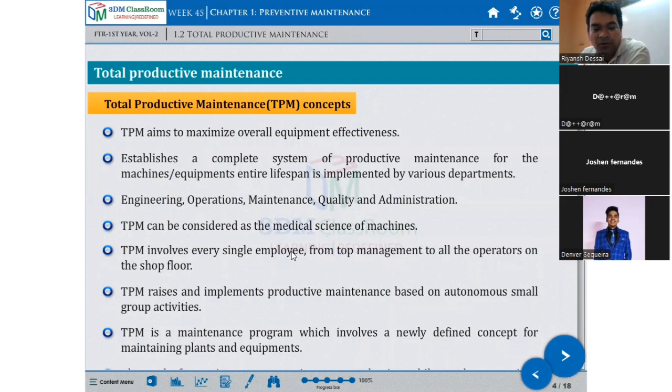TPM involves every single employee, from top management to all the operators on the shop floor. TPM raises and implements productive maintenance based on autonomous small group activity. TPM is a maintenance program which involves a newly defined concept for maintaining plant and equipment.

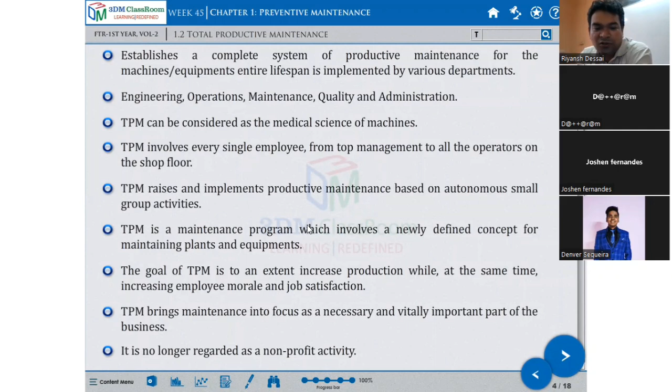TPM brings maintenance into focus as a necessary and vitally important part of the business. It is no longer regarded as a non-profit activity. Downtime of maintenance is scheduled as a part of the manufacturing day, in some cases as an integral part of the production process.

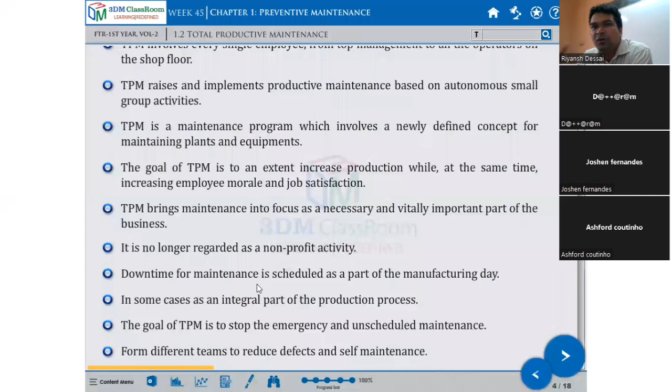Downtime means what? Suppose there is a breakdown, a 6-hour breakdown of the machine - that will be noted as downtime. It will remain in the log and schedule, noting that day the machine had a 6-hour breakdown. If there is a power failure, anything can happen. Whatever the time out of 24 hours - 3 hours, 4 hours - if the machine is not running, is under maintenance, that work is not getting done. That comes under downtime. But it's a loss for the company.

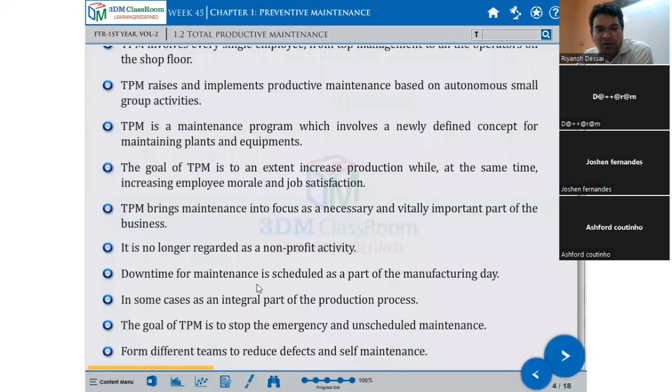The goal of TPM is to stop emergency and unscheduled maintenance, involving different teams to reduce defects through self-maintenance. These are the various uses of this type of system, total productive maintenance.

What are the advantages? Avoid wastage in a quickly changing economic environment. Overall, they are trying to reduce wastage of time, material, and manpower. There is also a time study, checking where the machine is getting extra time, delay, or transportation time - overall taking steps to avoid wastage in the quickly changing economic environment. Economic time wasted means there is a loss of money.

That has to be studied in this department - to produce goods without reducing product quality. This is challenging. They are producing goods without reducing product quality, meaning there is no sacrifice of quality. No one may sacrifice on quality. It produces goods without reducing product quality. If they want a surface finish of so many microns, they have to give it the time; they cannot negotiate with quality. They cannot sacrifice, because there will be rejection afterwards.

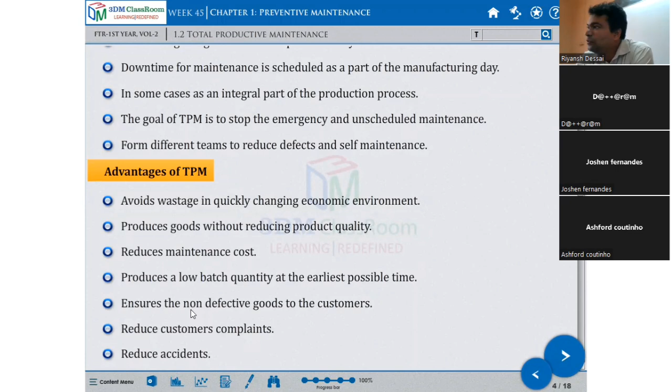So if you follow this system, there is an ensure that no defective goods going to the customers. Reduce the customer complaint. In non-defective items, customer complaints will be reduced, no? Otherwise the customer complaint handling becomes a burden. Now for example, your mobile phone.

Mobile phone - if the manufacturer Samsung company supplies a defective product, what will happen? Customer will send it back again. Then under warranty, they will rework everything, so waste of money. Suppose they have sent a quality product to you after checking and formulating everything, there is no complaint from the customers.

So here, this system gives total productive maintenance. The Samsung phone company, if they follow this type, they will follow this total productive maintenance.

Now, reduce accidents. If you maintain your machine properly, accurate, and everything - all machine guards and maintain the system - there will be no accident. If there is an accident in your company, again there will be a loss for the company. Therefore accident, medical insurance for the family, it's a problem - it becomes a record that there was an accident happened in so and so industry. It will remain on the record.

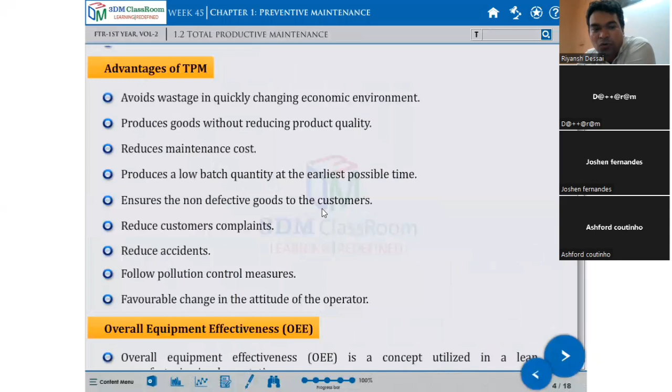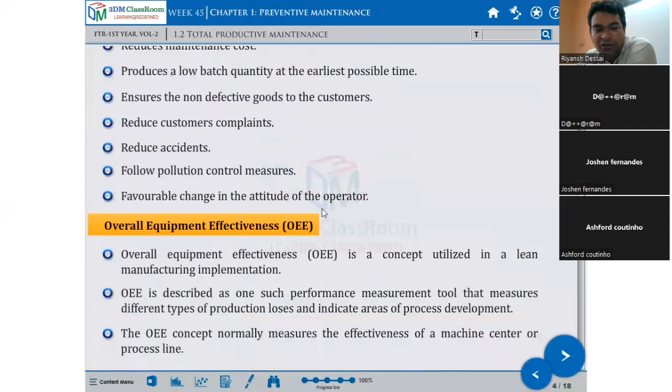Now, overall equipment effectiveness. First in TPM, we should know the full form of TPM - total productive maintenance. What are the concepts you can note down? You will find them in your book also. Then advantages and overall equipment effectiveness. Now what is overall equipment effectiveness? Equipment means - ordinary people can understand example like lathe machine, drilling machine, any equipment.

Overall equipment effectiveness, in short form you can write OEE, overall equipment effectiveness, is a concept utilized in lean manufacturing implementation. OEE is described subject a little bit in a management type way - try to understand, okay? But this theory is used nowadays within all industries. So OEE is described as one such performance measurement tool that measures the different types of production losses and indicates the area of process development.

Please try to understand this sentence. Overall equipment effectiveness is described as such a performance - performance means how we are doing, like cricket, Virat Kohli every day in the match. So performance is something that people note down - today how many runs he scored, how many balls. Same way in the machine also, there are such performance measurement tools.

They measure how many times the machine breaks down, how many times the operator takes for loading purpose - all things are measured. They measure how much time is wasted, how many times the machine belt failed - this type of study is going on. So measurement tools measure the different types of production losses - meaning if there is a breakdown, motor stopped, motor tripped, electric problem, switch burnt - this is the type of production losses. And it indicates the area of process development - like if there is a short circuit and damage of the MCB, motor getting heated and tripped, and the conductor or machine burns.

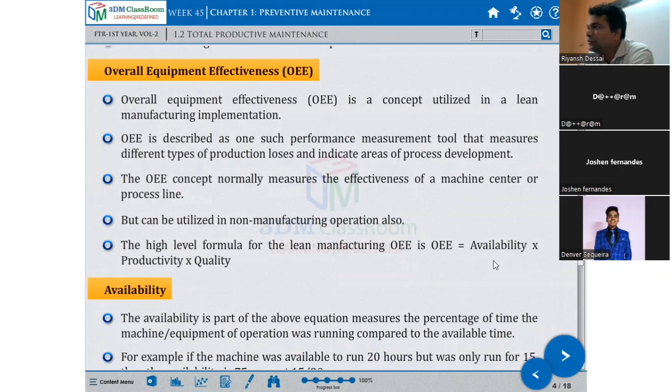Availability is part of the above equation. It measures the percentage of time the machine or equipment of operation was running compared to the available time - how much time the machine was available, how much the operator used it. That is the availability.

That is the percentage of time the machine or equipment is in operation - how much time a turning machine is running compared to the available time. For example, if the machine was available to run 20 hours but was only run for 15, then availability is 75%, that is 15 upon 20. So this is availability - you have to calculate that.

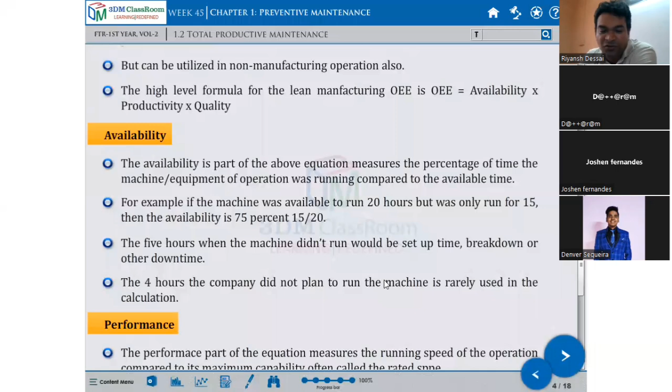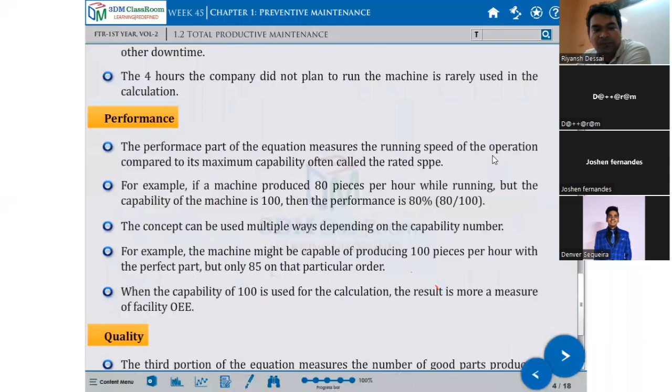Now what is the performance? How do you calculate your performance? The performance part of the equation measures the running speed of operation compared to its maximum capability, often called rated speed - like if a vehicle has capacity to run 150 kilometers but you are running at only 100-120 kilometers. So whatever the capacity is, how much of it you utilize, that is your performance.

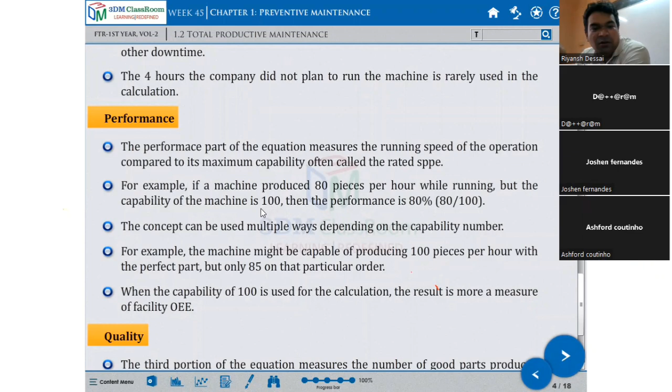For example, if the machine produces 80 pieces per hour while running, but the capability of the machine is 100 pieces per hour, then the performance is 80%. It performs at 80% of its 100% capacity.

Now what is Viraj's performance? Take an example of Viraj - what is his actual capacity of doing work? 120 numbers per hour is his actual product capacity. Now Viraj is performing only 50 pieces per hour. So that is his performance skill level.

Can anyone tell me? Can you divide and tell me how you are going to calculate Viraj's performance? Viraj's capacity is 120, but he is only doing 50. So what is his performance? The answer is 41.66%. How, Ashford, are you going to calculate that performance?

Now I am explaining in your language. Ashford has a capacity to wash a plate, 150 per hour - that's his actual capacity, 150 plates per hour. But he is washing only 70 plates per hour. What is his performance?

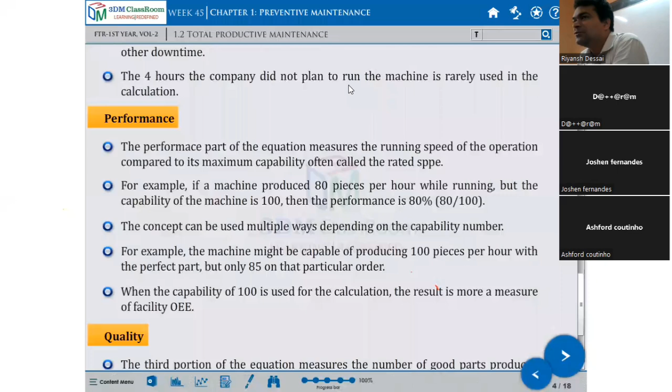46.66% - even Viraj's example came to around similar value, 41%, meaning overall he is not utilizing 100%. For some machines it's difficult to utilize 100%, but there should be a performance of 80%, 70%, 90% - it has to perform. Suppose he is performing below 50%, is anyone accounting for that? Our intention was we need to utilize 100%, that's our goal, but due to some actual difficulties and failures, we have to utilize at least 80% to 90%. That performance has to be achieved - this is the way the industry calculates performance.